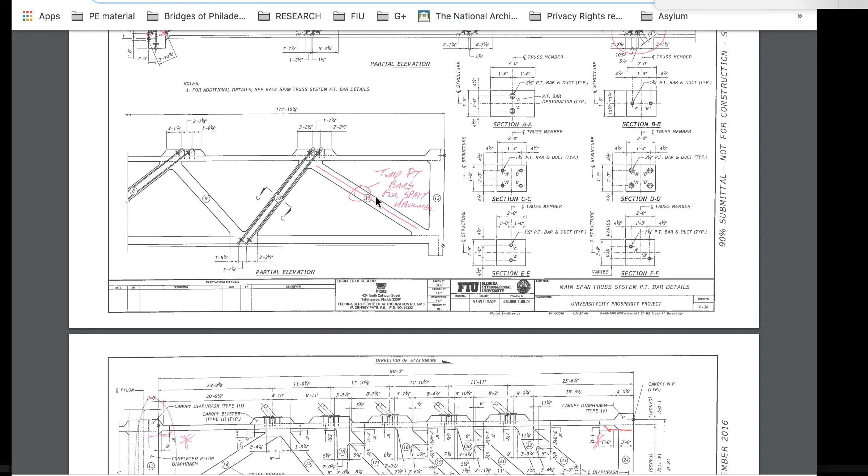Let me get the plan. Here they are. This is what FDOT did. So Denney Pate's plans were presented. Obviously, FDOT's engineers, one or multiple engineers there might have gone over the plans, but we have writing on the plans from FDOT. Those plans include temporary post-tension bars for SPMT hauling.

Denney Pate, I remember these plans where they had the wrong plans out there initially, and now they've come full circle again for you guys. I'm showing that Denney Pate's plans did not include post-tensioning in this member. If FDOT left this alone, then they could say they didn't have a hand in it. But FDOT did have a hand in it, because this is the bar that was detensioned. This is the retensioning during failure.

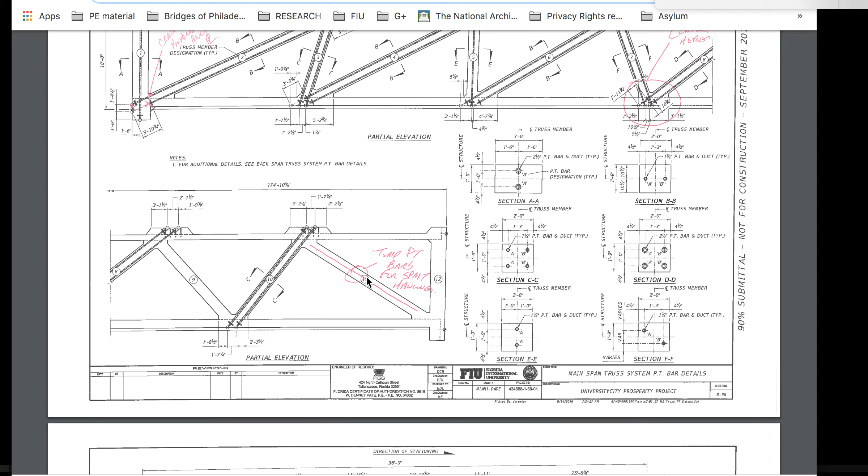Denney Pate, or FIGG Engineering, did not add this in there. They would have maybe considered it, but they decided not to. And this playing around with multiple engineers diving in and dipping out, I find quite irritating, especially with the I-35W bridge where it collapsed. At one point, the federal government came along and said, "We don't like the gusset you're using, the type of steel." Nobody really talks about this I-35W issue.

The contractor said, "Okay, I'll change it to the steel you like." The contractor went with half-inch steel of the requirement that the government wanted. The government then vanished. In the report, you don't see NTSB stating the government was wrong. They should have followed up, approved the half-inch plate, or said it was not approved, but they went forward with it. The NTSB report leaves you to assume that the half-inch plate was not acceptable.

Obviously, the half-inch plate was acceptable because the engineers for the government were watching this structure, had their thumb on it. But the NTSB report doesn't show that the government should have followed up, that the half-inch plate was now accepted. Let me pause this.

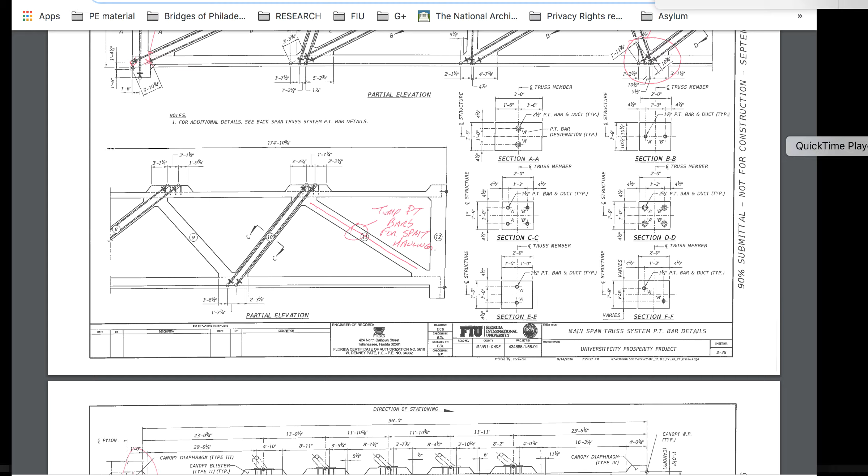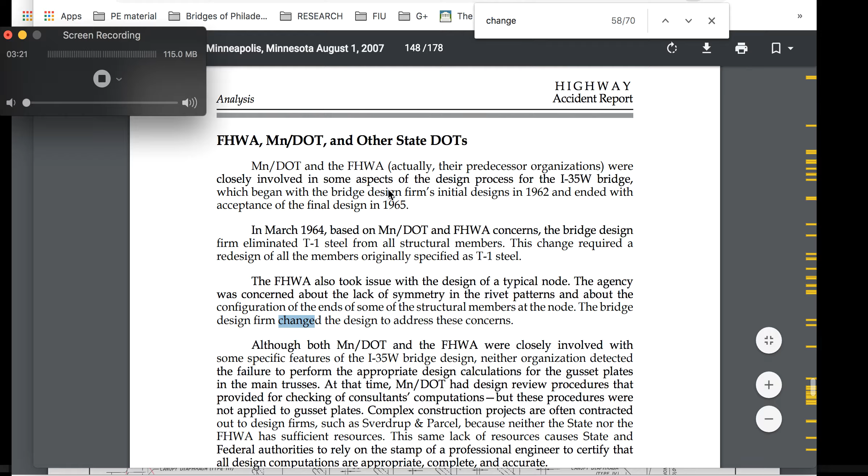So I pulled up the NTSB report to show you what I was saying. In the analysis: the Federal Highway, Minnesota Department of Transportation, actually their predecessor organizations, were closely involved in some aspects of the design process for the I-35W bridge, which began with the bridge design firm's initial designs in 1962 and ended with the acceptance of the final design in 1965. So they stayed involved for 3 years.

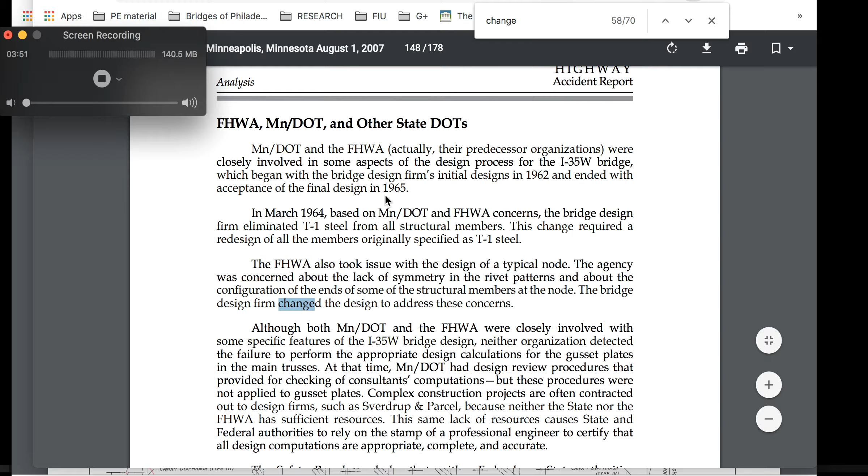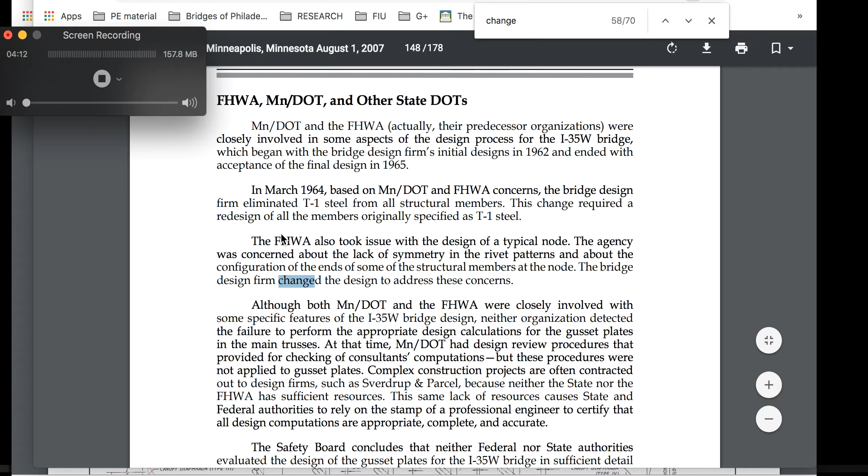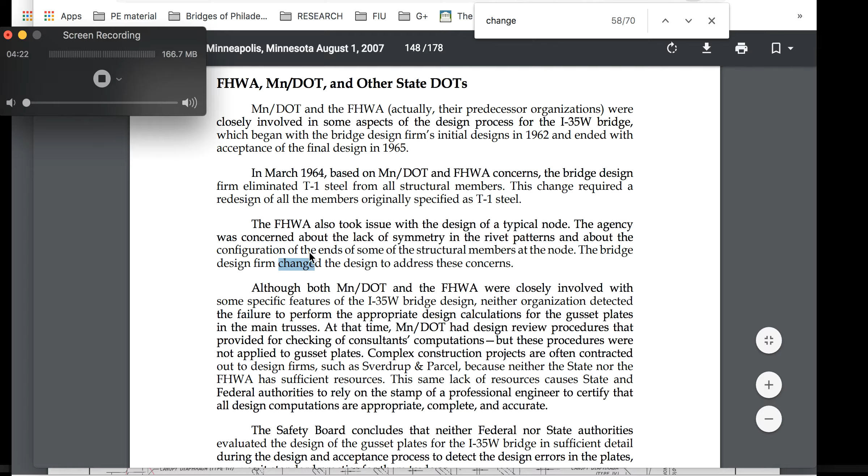In 1964, based on these people, Minnesota Department of Transportation and the Federal Highway, the design firm eliminated T1 steel from all structural members. This change required a redesign of all the members originally specified as T1 steel. So they changed again. The Federal Highway also took issue with the design of a typical node. The agency was concerned about the lack of symmetry in the riveting pattern. Everybody's dipping in, changing the structure, and then dipping away held harmless for their changes.

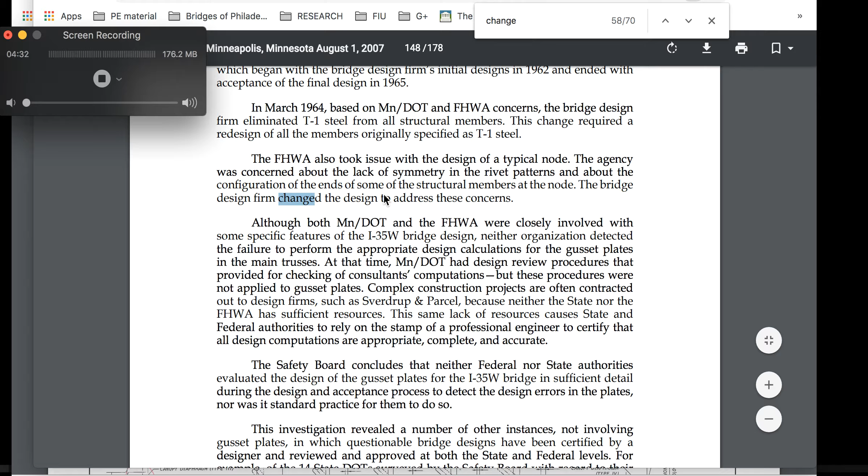I find this unfair. Although both were closely involved with specific features of the I-35W bridge design, neither organization detected the failure to perform the appropriate design calculations for the gusset plates in the main trusses. So you're jumping in, telling them, "I don't like this, do that," but NTSB is making it clear that neither of them found the failure before it happened.

At the time, Minnesota Department of Transportation had design review procedures that provided for checking of consultants' computations, but these were not applied to gusset plates. Complex construction projects are often contracted out to design firms because neither the state nor the federal highway department has sufficient resources. The same lack of resources causes authorities to rely on the stamp of professional engineers to certify that all design computations are appropriate, complete, and accurate.

Yeah, and then they jump into the plans and start screwing with them. And then they jump away like, I didn't do that. Hold on.

So here we have the Florida Department of Transportation jumping in and saying, add this in there. And down the line, this was the issue. This caused an issue because this wasn't added per the original engineers, or if this wasn't added or even suggested by FDOT, then this failure wouldn't have happened in this capacity.

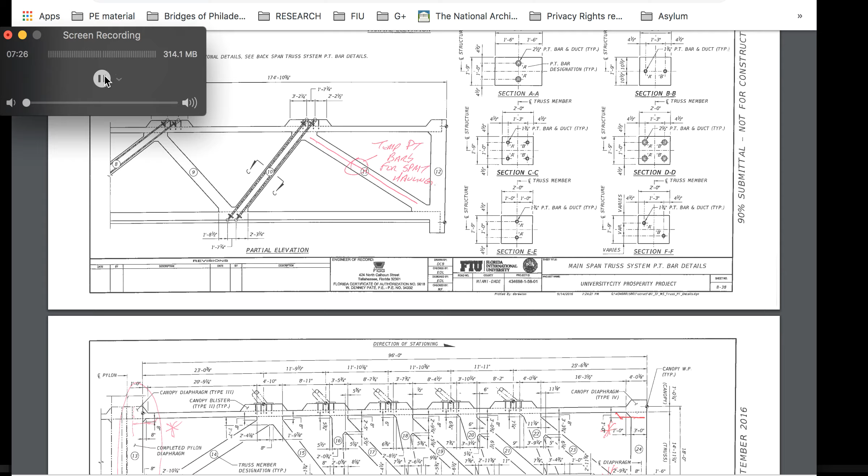So as you look here at the superstructure precasting, right here we refer to stress deck longitudinal tendons D1. That's times 2, both sides. Stress canopy, C2. And then here's the part where FDOT jumps in. But stress post-tension bars, diagonal members 2 and 11.

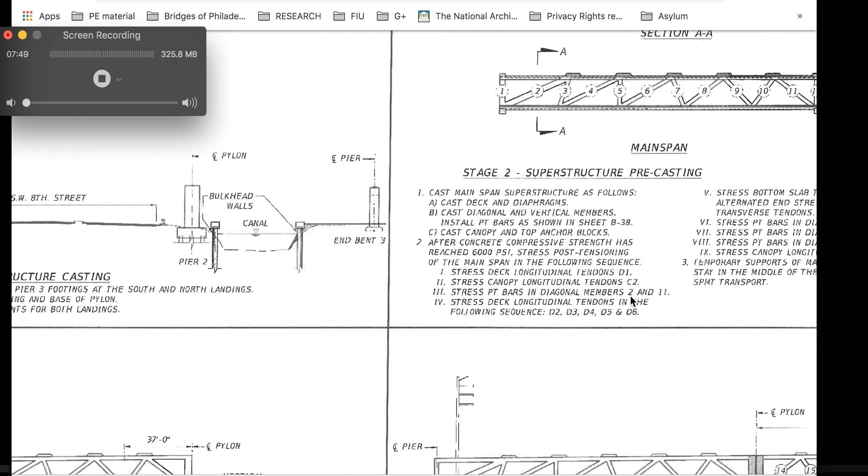And evidence of why this should have been done last and during transportation, after load testing, in fact. Again, it's just so iffy, putting these loads on there and then detensioning and taking the loads off and thinking you did, and not giving it respect as a cycle on the bridge. It's a cycle. They did something, and especially with the reports that we've seen that when 2 and 11 was done, specifically 11, it created tension on number 10 as it appears in tension cracks.

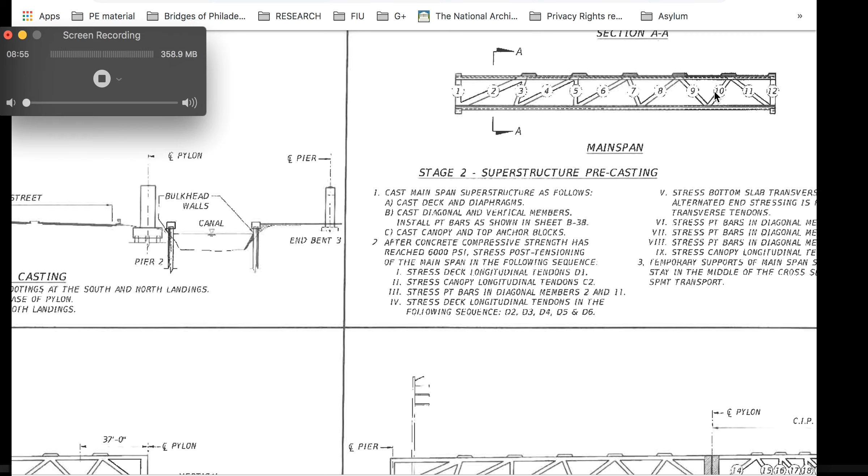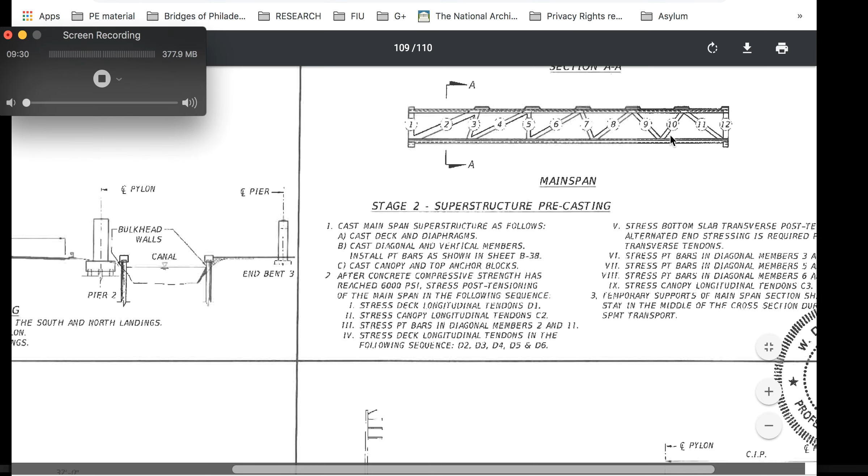So making it clear, the safety board concluded that neither federal nor state authorities evaluated the design of the gusset plates for the I-35W bridge in sufficient detail during the design and acceptance procedures. And I think we're going to see the same thing with FDOT. FDOT's claiming that, hey, we didn't really do much. But I'm saying they're the ones who insisted on adding that tensioning in number 11, those rods.

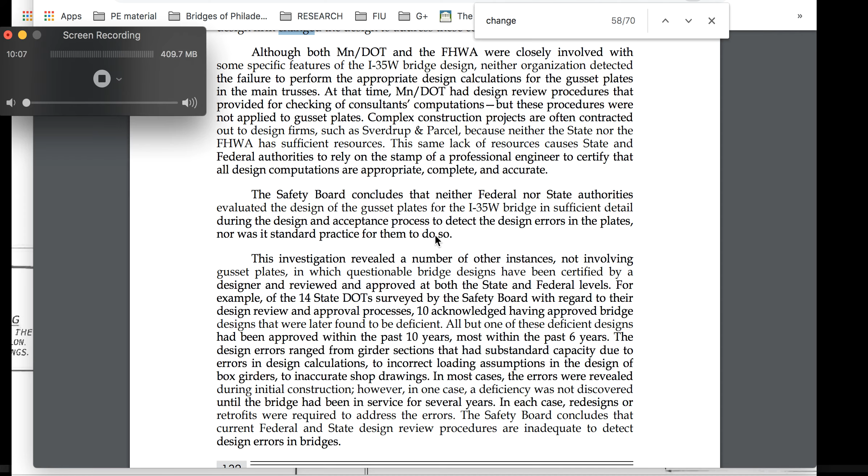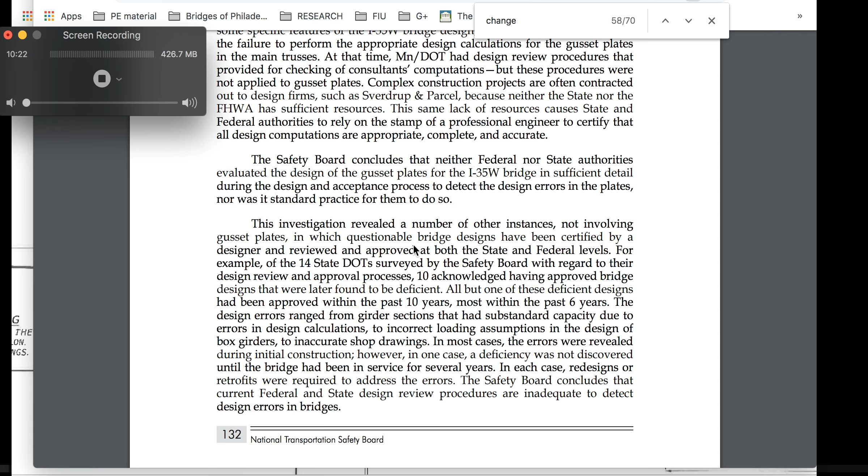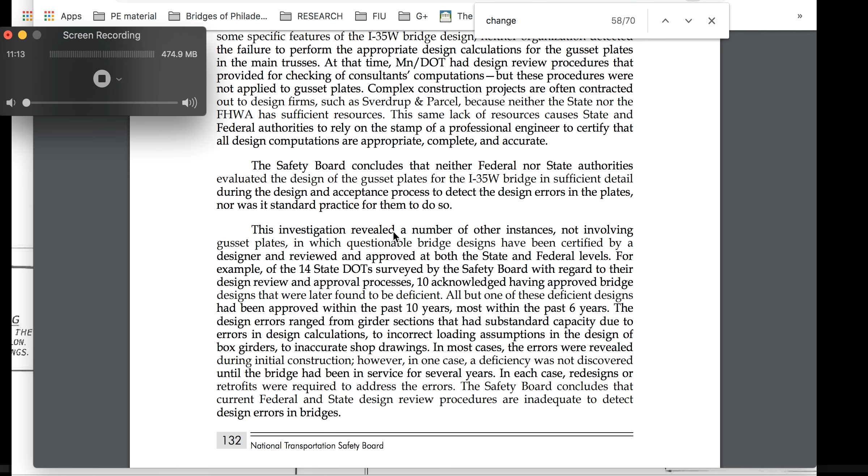You can't just come to a Denny Pate and say, Denny Pate, I insist you do this, and you put your stamp on it. That's basically what the state did to Denny Pate. That's basically what the state and federal government did to this bridge guy, and then turn around years later and blame them for the errors. If you look in this report, they'll back it out, and they'll just blame the contractor and not the state putting their hand in the mixing pot. I think we'll see the same type of retraction in this NTSB report, unless my video has an effect.